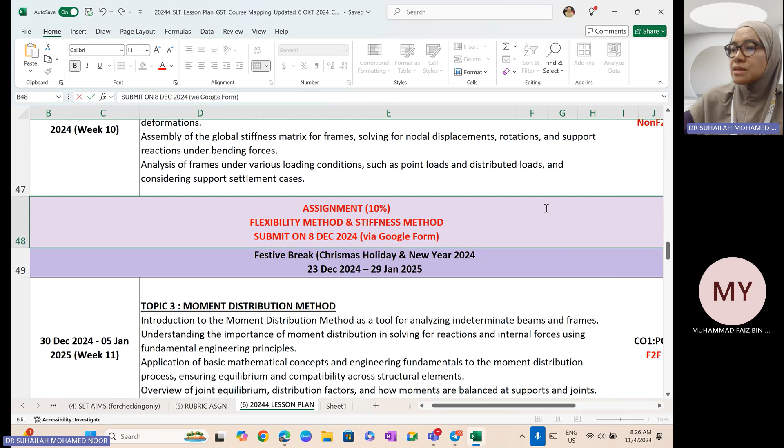So assignment flexibility method and stiffness method, one question you have to solve using both method. It is truss structure. Truss structure means you can start from this week for flexibility method, followed by stiffness method for week number 6, 7.

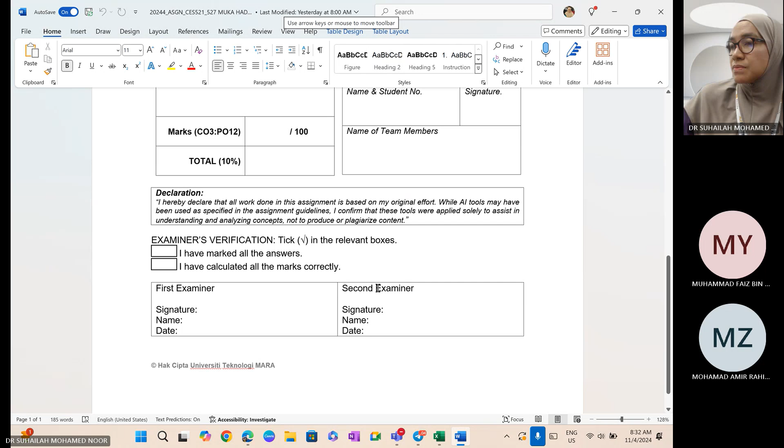Okay, that's number 1. Number 2, okay, assignment.

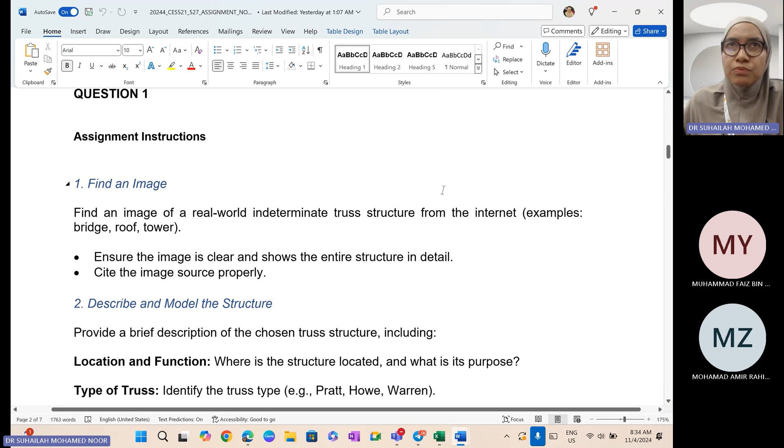Okay, so it doesn't matter whether you choose a bridge, a roof, or a tower, it's up to you, but it must be an indeterminate truss. Find it yourselves from the internet. From the internet you can search on Google image, Google search, or you can search from a journal paper, it's up to you. As long as it's a truss picture.

Then describe the model and model the structure. Provide a brief description of the chosen truss structure, including, normally when we search for the picture it will give us the name of the bridge, for example. So all that information you can find in ChatGPT. Go and find the detail of the truss, where it's located, what is its purpose.

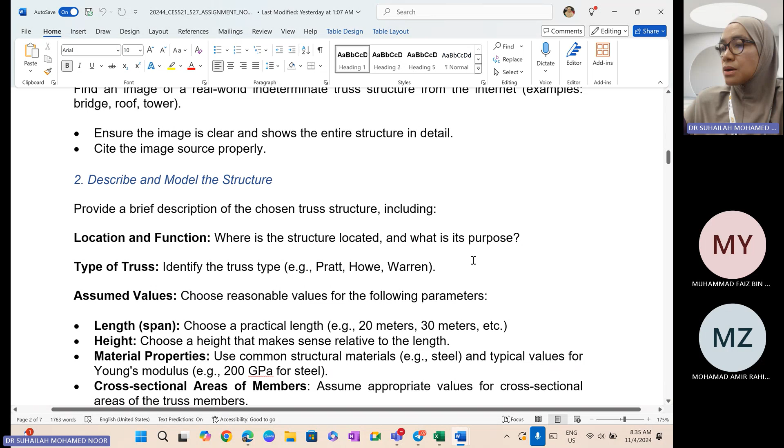Okay, and then you can use ChatGPT to identify, not only ChatGPT, you can use Copilot, Perplexity, or Gemini, or any one, just choose one tool only, to identify the type of the truss. Truss has many types and names which we might not discuss in detail in class, so this is good for your understanding about trusses in the real world.

Okay, this is an example, we have Pratt, Howe, Warren, and many more. So ChatGPT or Gemini or Copilot or Claude AI or Perplexity will identify for you the type or name of the truss. All this with the help of ChatGPT, good for your knowledge.

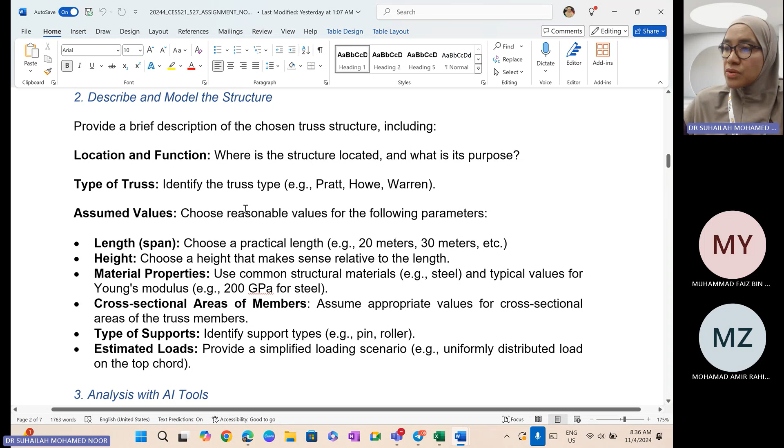Okay, and then I want you to assume values. Choose reasonable values for the following parameters, so all this is up to you to design how. Okay, practical length, this is an example, the length of the span, height of the truss. Choose a height that makes sense.

You just talk to ChatGPT and it will give you all the suggestions. Okay, material properties that are suitable, such as steel. Typical value for Young's modulus for steel is 200, which we usually use. If you want to suggest any other value, it's up to you.

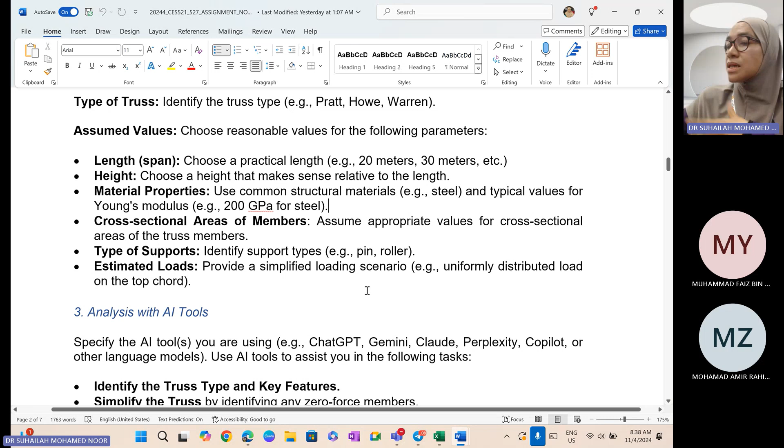Okay, analysis with AI tool. Specify the AI tool you are using, any one, but only one. Choose only one tool. Okay, use the AI tool to assist you in the following task, as mentioned earlier.

Okay, identify the truss type, the key feature, simplify the truss, estimate a support reaction, understand flexibility method and stiffness method, explore analysis approach, and study the concept of redundancy.

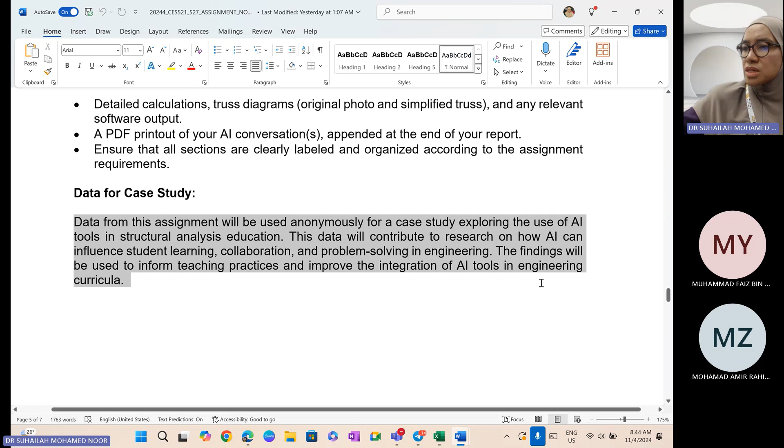Yang ni the data for this assignment will be used anonymously for case study exploring the use of AI tools in structure analysis education. Okay, so yang ni rubric for evaluation. Saya bagi sekali, rubric for evaluation, that's all.

So normally image yang you all search dari internet tu, kita boleh masuk ke Google. Okay, you just go to Bing ke Google. So, truss, truss structure. Truss structure, you masuk truss structure dan then you go to image. So you can choose anyone that you like.

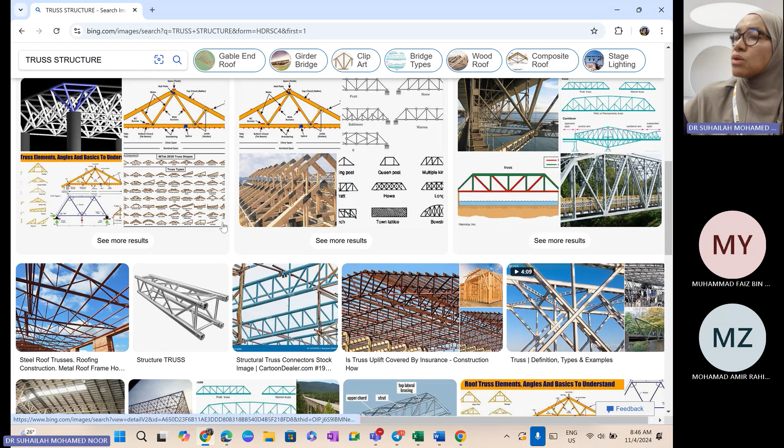You nak ambil yang ni roof. Yang ni roof, tapi real structure, ambil yang real one dan kita simplify. Okay, jangan ambil yang lukisan, saya nak yang image.

Ataupun you terus namakan kat sini, you nak bridge truss. Bridge truss. Pandai-pandai lah you search bridge truss. Okay, then you choose one. Mana-mana, yang ni ke, for example.

Yang tadi tu dah okey. Yang ni dah okey. Okay, so dah ada nama dia kat sini, so you just copy. You just copy this information.

And then you go to, for example, ChatGPT. And then you just paste. So you dah boleh start buat sikit-sikit, sebab nanti kalau you pakai yang free version kan, dia ada limitation daily. So nanti bila you masuk, you just sambung dalam same conversation. Okay, you boleh start, tell me about this truss.

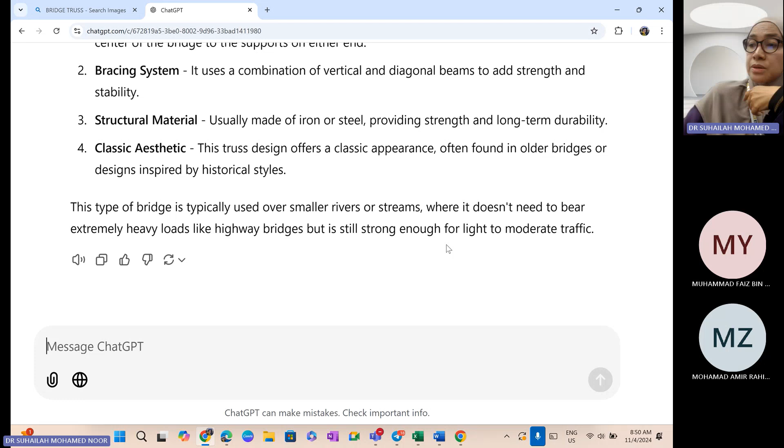Okay, and the best is you kena describe about yourself. Bagi tahu dia, saya student part berapa, taking subject apa, this is for assignment, untuk apa. So you kena communicate benda tu. Apa nilai yang you nak assume, you nak copy some part from the instruction supaya dia faham apa yang dia kena request. So you just talk, okay, nanti minta assumption related to that.

Nanti conversation ni akan ada long conversation, along the process, dan then finally you boleh print, print PDF, print conversation, print PDF, macam ni lah, macam biasa.

Okay, so yang ni yang jadi appendix tu nantilah. And actually the analysis part, the calculation part, structure yang quite simple analysis, dia bukan macam soalan dalam exam yang lagi susah analisis daripada yang real structure ni. Cuma you kena gunakan this conversation, this AI tools untuk bantu you untuk dapat banyak info.

Okay, clear? Hari ni awal bulan 11, so sampai 8 Disember, you ada 1 bulan, so you dah boleh start, start chatting dengan dia. Nanti saya dah dapat verification from Cik Rosul, saya akan terus blast.

Okay, now kita akan masuk ke soalan yang saya bagi dalam group. Formative assessment ada 2 kat sini, satu frame question, satu lagi truss question. Okay, kita bincang truss dulu, frame tu nanti ada masa kita akan bincang balik.

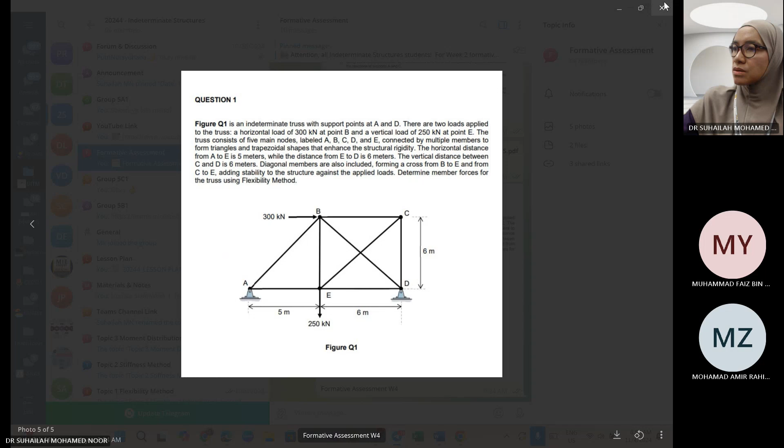Okay, this is the truss question. Dah ada dalam your Telegram. So kita nak buat yang ni for today's session. Okay?

So hari ni berapa hari bulan? 4 hari bulan.

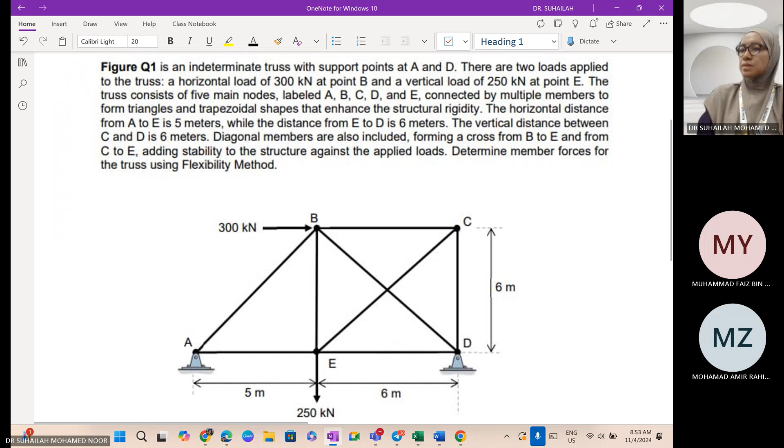Okay, this is the truss. This truss, okay, if we check for degree of indeterminacy, DOI, okay, how many members? We have 1, 2, 3, 4, 5, 6, 7, 8 kan? So it is 8.

M plus R. R is 4, R is 4 minus 2J. 2J, berapa J? 5J. So 2 kali 5, 10. So we get 2 degree of indeterminacy. Okay, 2 degree of indeterminacy. So this is the truss.

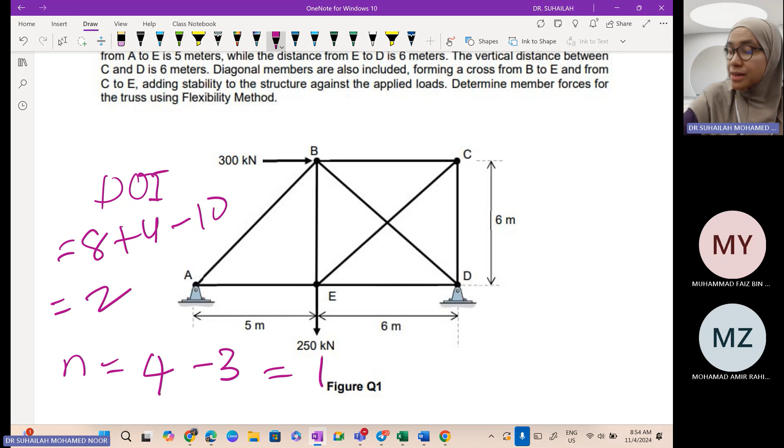Okay, and we check for external indeterminacy. We check whether it has external indeterminacy. We check for difference between unknown reaction and 3 equilibrium equation. We get 1. So maksudnya ada satu redundant dalam sistem ni from support reaction. Ada satu from support reaction.

So kita akan ada R1 and R2. Okay, ada satu from support reaction sebab ada 2 pin for unknown reaction. Buang satu tinggal 3, minimum. Means kita boleh buang satu.

Okay, so kita boleh pilih let's say DX as the redundant. DX as the redundant, and another redundant is come from member. We normally remove yang bersilang ni. Okay, buang satu lah, buang satu yang bersilang. So, kita buang BD. Let's say buang BD lah.

FBD. Okay, let's say kita buang BD. So, it become FBD as the redundant. So, ada 2 redundant and the compatibility equation for this is delta

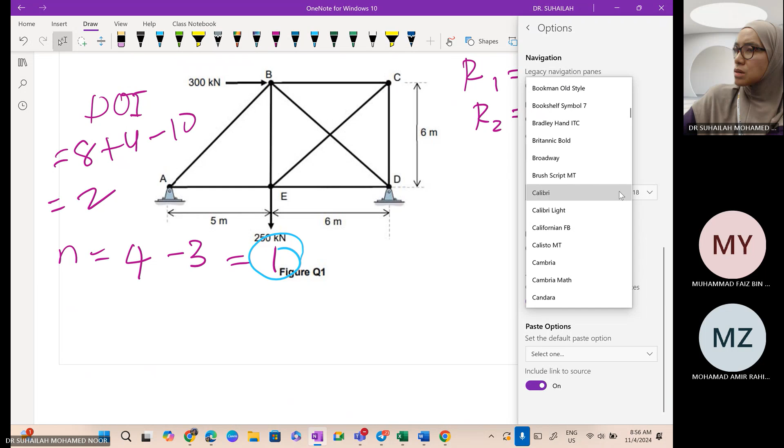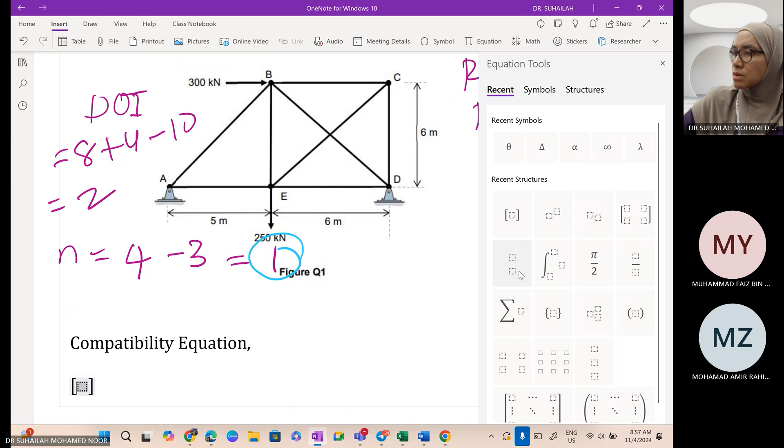Okay, the compatibility equation. Besarkan font. Okay, compatibility equation. So straight away we should get the equation. Plus ini, ini kali dengan redundant, sama dengan okay, this is the format, okay, the compatibility equation like this.

So the redundant is dx. Okay, tak apa, sini letak dx. Kena pakai yang ni. Okay, the first redundant is dx. The second redundant is f.

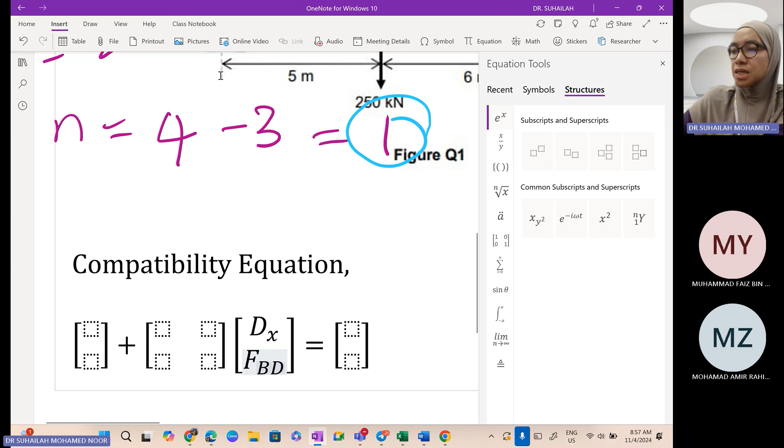F tadi apa? BD, FBD. Okay, so dia equal to 0. No support settlement equal to 0.

Saya tak nampak yang muka tu. Kelas ni. Oh, demam.

Okay, so yang ni, yang dua yang depan ni for the primary system. For the primary system, we have delta 1 naught ya. We have delta one naught for the primary system, and for redundant primary system ada dua lah, delta 1 naught and delta 2 naught.

Okay, and then matrix yang dalam ni it is 2 by 2 matrix sebab ada 2 redundant. Okay, sekejap.

Okay, it is F11, F12, F21, and F22. So dalam ni there are 6 displacement.

6 displacement. Start from delta 1 naught, delta 2 naught, ada naught symbol for the primary truss. Okay, and ada dua redundant truss, F11, F12, F21 and F22.

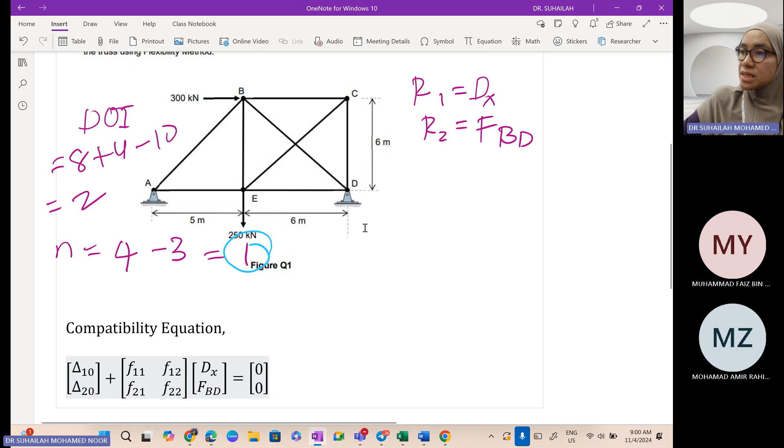Okay, so ini just first step yang kita akan buat biasanya untuk analyze truss. Okay, lepas kita dah identify degree of indeterminacy and identify juga for external or internal indeterminacy, we decide the redundant and kita terus dapat the compatibility equation.

So daripada sini kita tahu yang kita akan ada 6, dan daripada sini ada tiga simbol dalam ni: 0, 1, 2. Dalam 6 displacement ni ada 3 simbol naught, 1, 2. So from that kita tahu yang kita ada 3 system to calculate N naught, N1 and N2. Okay, ada 3 simbol dalam ni kan?

Okay, so we will have to analyze the first system. It is primary truss. And for primary truss kita akan cari ni. Okay, kita akan... kan dekat sini. Okay, from the primary truss kita akan cari N naught for the primary truss.

Apalah kurungan tu. Okay, so for the primary truss. So for this primary truss, we will have, okay, yang ni saya nak draw balik. Saya copy ni je.

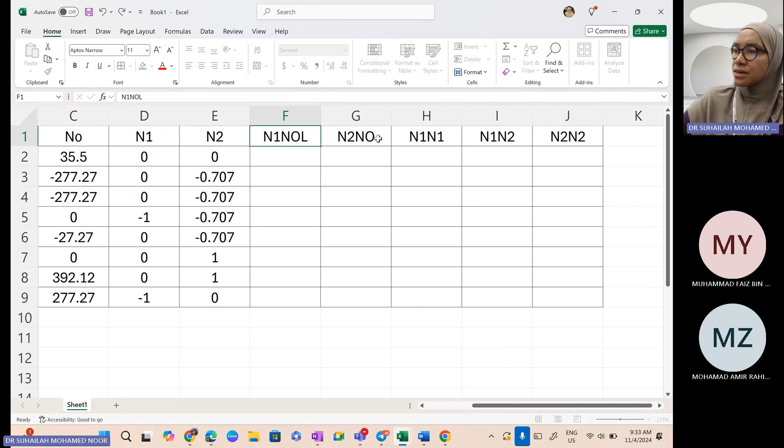Jangan lupa kena letak L, sebab formula dia ada L. Formula dia ada L, so kena letak L. Per dengan AE constant, so AE kita tak masukkan dalam table lah.

Kita per outside. Okay, N1 N0 L. N1 kali dengan N0 kali dengan L. Then N2 kali dengan N0 kali dengan L. N1 kali dengan N1 kali dengan L.

N1, N2. N1 kali dengan N2 kali dengan L. And then N2 kali dengan N2 kali dengan L. Okay, and then saya drag untuk kolom lain. Saya bunda je lah 2.999 kan. Okay, so dah dapat dah.

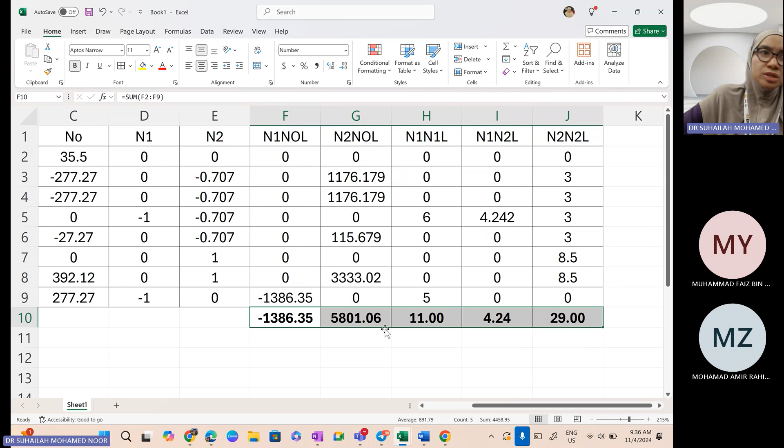Okay, nampak tu. Okay, kita dapat delta 1 node. Delta 1 naught is negative 1386.35 over AE. Delta 2 naught is 5801.06. F11 is 11. F12, F21 is 4.24. And F22 is 29. Okay, so this is the table.

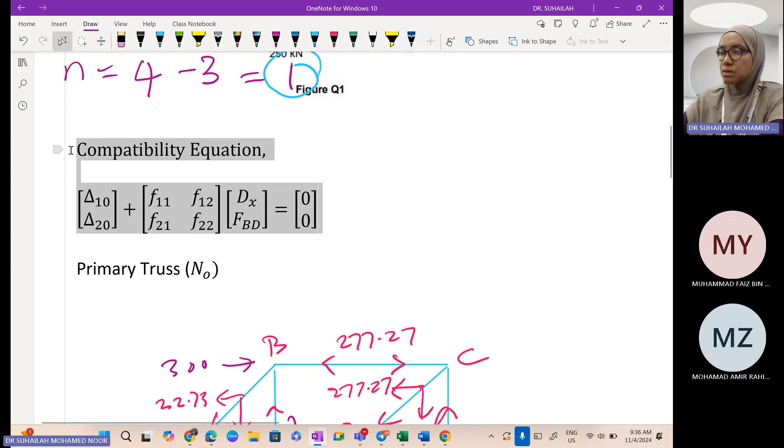So yang ni saya bawa ke OneNote tadi. Okay, so tadi kita ada this equation, compatibility equation. Okay, now kita akan okay. So for the compatibility equation, it is 1 over EA.

Kat sini ada 1 over EA, kat sini juga ada 1 over EA. Ini 1 over EA, sini akan ada 1 over EA. Okay. So delta 1 naught is negative 1386.35. Okay, 0.35. And then 5801. 5801.06. Okay, F11 is 11.

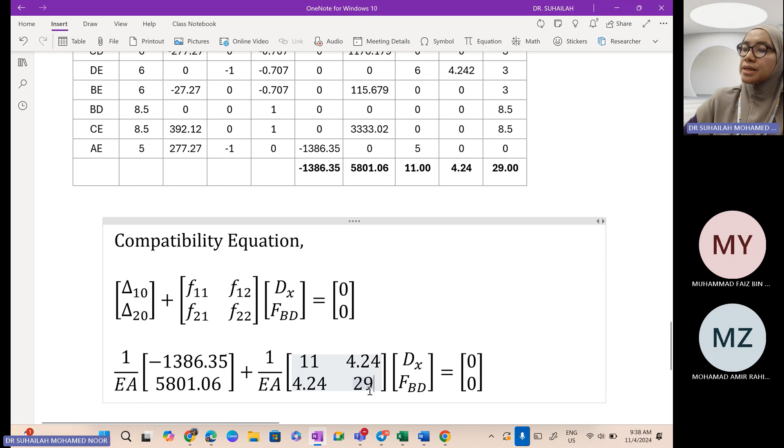F11 is 11. F12 is 4.24. Okay, and ini also 4.24. And then this is 29. Okay. So this is the compatibility equation.

And then we will solve, okay, solve for the redundants. Solve for the redundants. EI will be cancelled. EA will be cancelled. EA will be cancelled.

Saya bawa ke sebelah sini. So dia jadi positif dengan negatif terbalik, betul? It is kosong plus dengan kosong minus. So terbaliklah dia punya sign. Betul? So yang ini tak adalah solve for redundant.

Okay, solve for redundant is just like solving two simultaneous equation. EA will be cancelled. We bring this value to the other side. It is 0 minus. Jadi positif, 0 minus positif. And 0 minus 5801 jadi negatif. Okay? So now kita nak solve this.

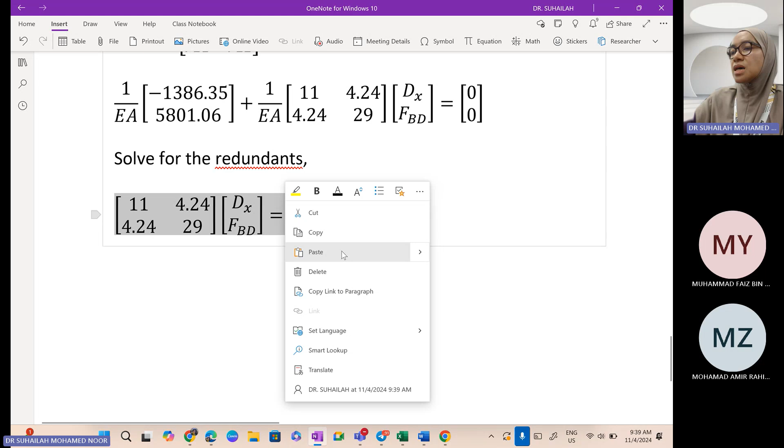So dalam calculator, bila kita solve, yang ni apa? X dengan Y kan? X dengan Y kan? Betul kan? X, Y kan? Kalau dalam calculator, kita masukkan value lah A1, A2, A1, B1, C1, A2, B2, C2, right? Okay?

Okay, now dah dapat jawapan. Okay, so jawapan dia, okay, jawapan dia, betul. Okay, X is 215.27. So X is 215.2, cuba check 27. And another one is negative 231.51. All kilonewton.

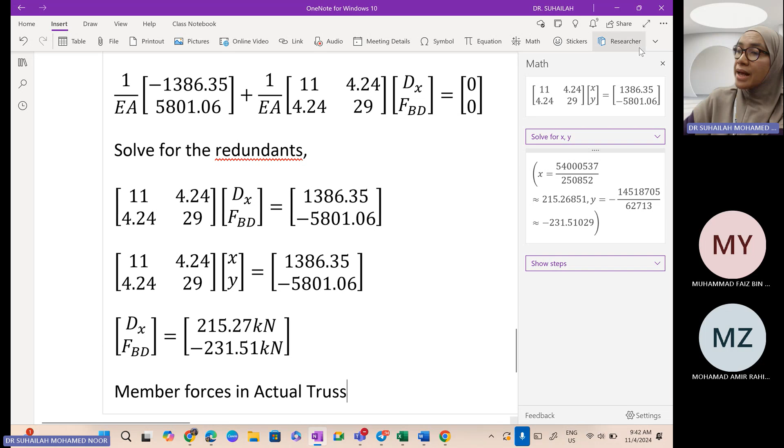Okay, so dah dapat ni kan? So daripada sini kita akan dapat satu equation untuk calculate member forces in actual truss. Kan tadi saya kata nak cari member forces in actual truss kan? Okay, member forces in actual truss ni N.

Dia primary system N0. Kan? Primary system is N0. Redundant 1, N1 dia kena kali dengan R1. Dia kali redundant 1 kan? Redundant 1 is 215.27. Lepas tu N2.

N2 kali dengan redundant 2. Redundant 2 is negative 231.51. So this equation, from this equation, which is based on the principle of superposition, kita akan dapat kira nilai member forces in actual truss. So yang ni kat belakang lah. Yang ni N1, so yang ni akan jadi negatif, tolak. Yang ni saya bawa belakang.

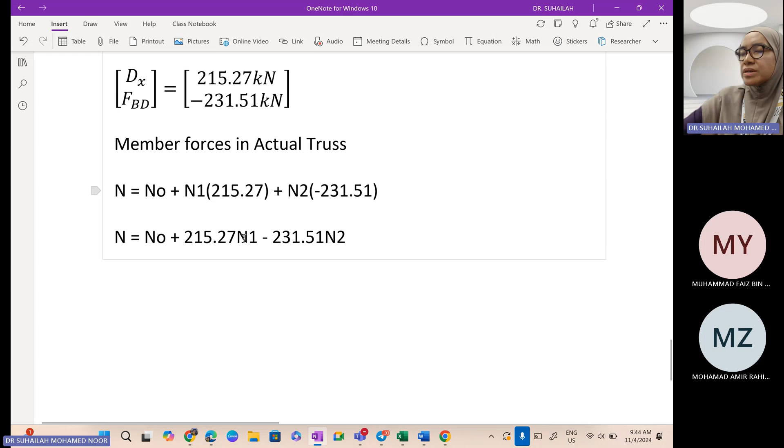So ni dia punya equation lah. Okay, it is N0 plus 215.27 N1 and tolak 231.51 N2. So this is the equation to calculate member forces in actual truss. Okay, yang ni saya bawa ke sini. Okay, so yang kita nak cari now is member forces in actual truss and so this is the formula.

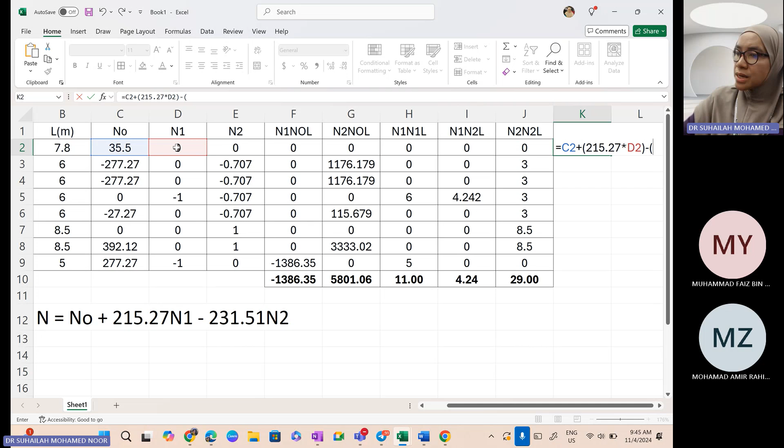It is N0 plus kurungan 215.27 kalikan dengan N1 tutup, minus buka kurungan 231.51 times N2. The formula.

Okay, so ni je, dan akan dapat member forces. Okay, so this is the final answer, member forces. So dalam assignment tu you kena buat this step. Sampai sini. Okay, yang tadi tu number 5 kan? Number 4, step number 4, flexibility method. How to solve flexibility, this process.

Okay, you can use whatever tools you have to help with your assignment. Most important thing is we need to understand the concept of flexibility method and how we apply all the tools to solve for the answer.

So basically for truss analysis using flexibility method, when we solve for the redundant, we make a table and find all this value. We can use Excel, but in the exam we cannot use Excel. So for exam questions on flexibility method,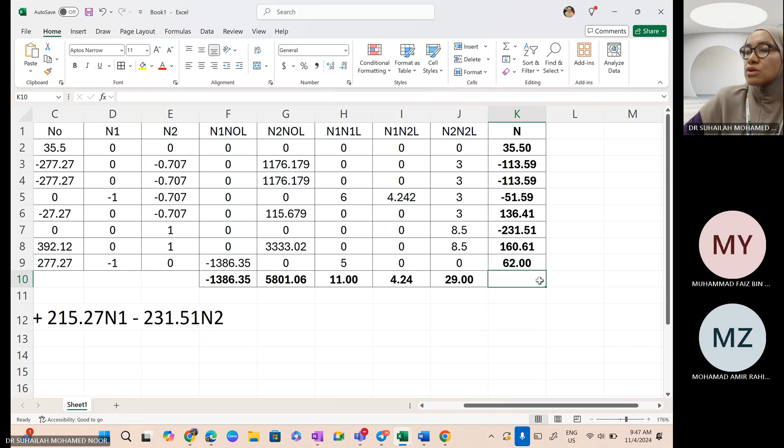Okay, so this I copied back for the final table since it has the member forces. So that's it for flexibility method for truss.

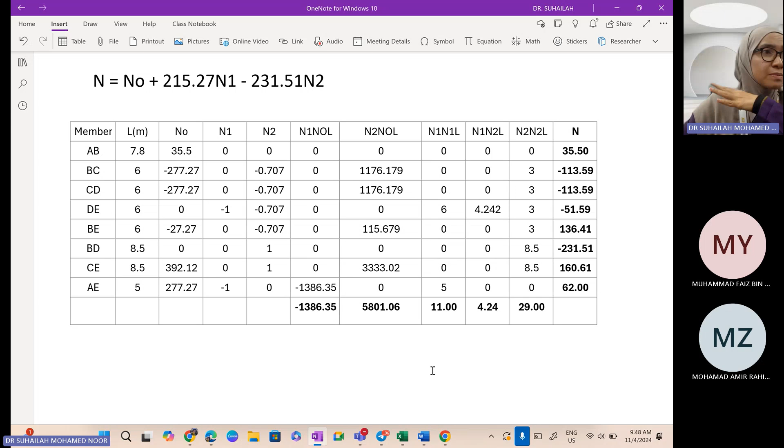That's why we need to be clear on what we want to achieve. Objective must be clear. So for the procedure, of course with ChatGPT it's not the main reference. The main reference is the knowledge you get from the textbook. So what I deliver is the knowledge from the textbook. Everything here can help us understand more, to enhance understanding, to get more knowledge, so we can build from there.

And we have a simplified truss based on the image to be analyzed using flexibility method.

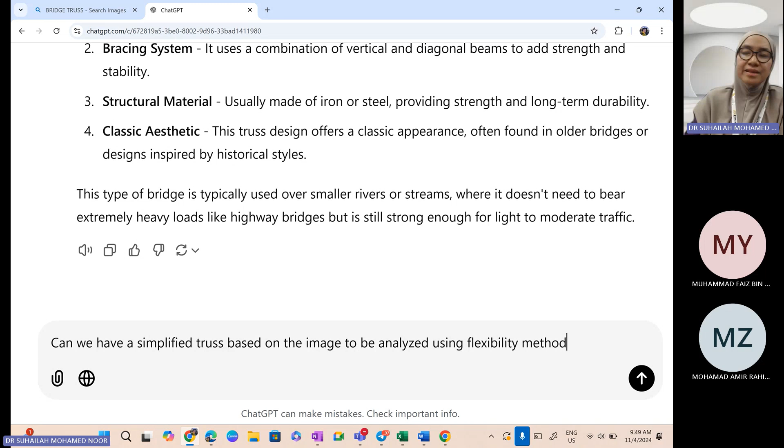Just ask anything, and it will give a response. We'll look at what response it gives. And please read the response because sometimes it's not correct. That's why the textbook is always the main reference, even though we now have tools we can apply, the textbook is still very important.